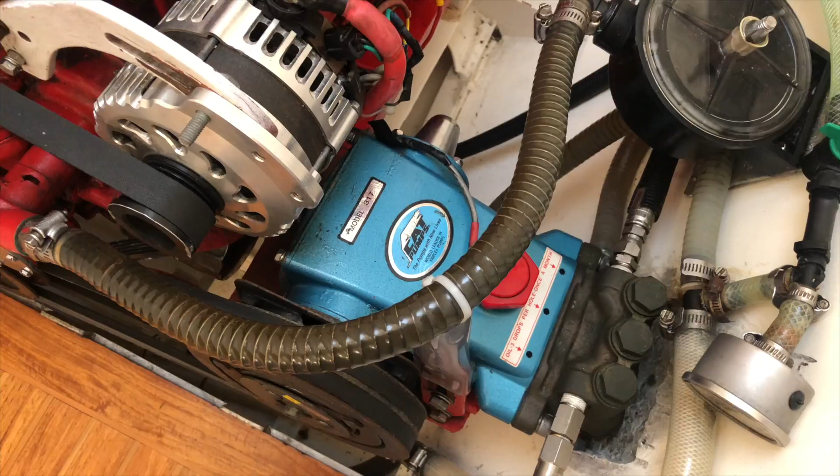I decided on a Cat pump. There are cheaper pumps available, but I think it was the most reputable. Cost about half the total cost of my system. Cost about $1,500, including the clutch, the electromagnetic clutch. So mine is an engine-driven high pressure pump.

You can use AC motors that you would belt to your high pressure pump. Then you need to work out how to drive your 1.5 horsepower AC motor. Can you do it from your inverter alone, or are you going to need to have a generator to run? Even the little Honda generator could probably run that. However, mine's engine driven, and that's what I'll describe to you.

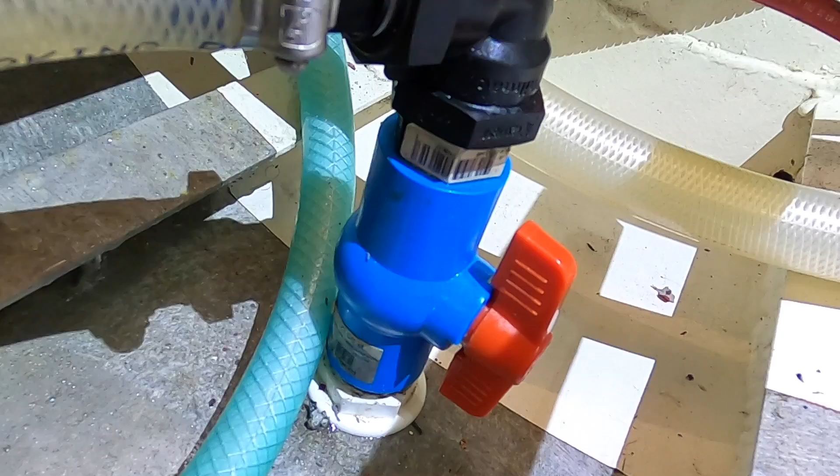So from the very start of the flow is the through hull. I decided to use a dedicated through hull, that's mostly recommended, so there can be much less chance of flow interruption. Mine is nylon because I have an aluminium boat, so all my through hulls are nylon or acetal, plastic anyway. My seacock is a simple $3 or $4 screw-on PVC type seacock.

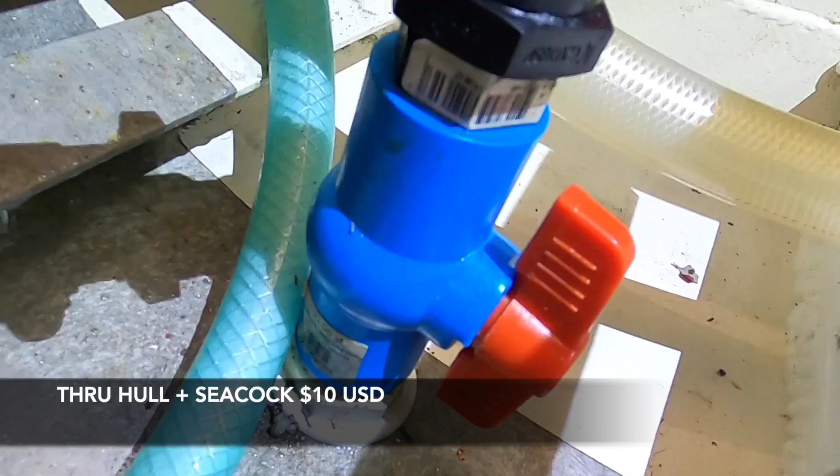All these aluminium boats are using this sort of seacock. You could argue that it's not safe, but we've never had a problem. If you're really worried about it, you can change them out every 5 years, and it's going to cost you about $5. The next in the line is the sea strainer, and I simply used an engine intake sea strainer, which costs $40 or $50. It's just to stop the big particles, seaweed, plastic, etc.

After that comes another PVC valve. These again, $3 or $4 each. From there onwards, basically, it's into the high pressure pump. But you need to have a manifold because there's a few different things you want to suck into your system. One of them is the seawater. Another one is freshwater for flushing.

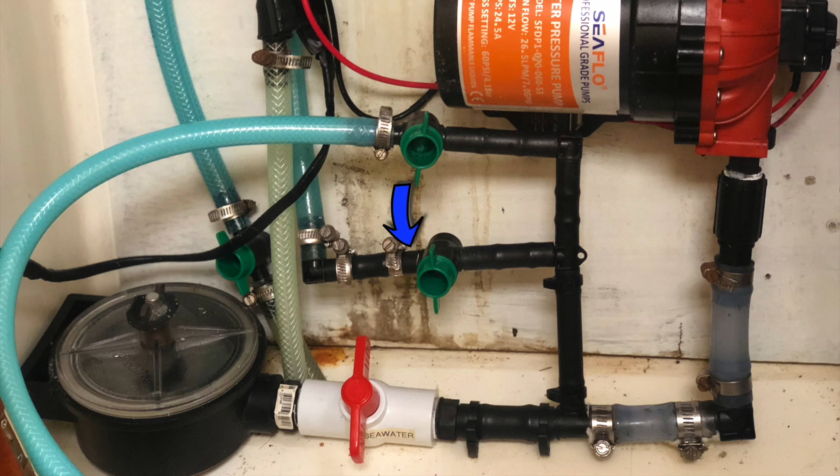So I've used a 1/2-inch poly piping from the hardware with the little irrigation taps that you can buy from the hardware for just $1 or $2. And I've plumbed that into my freshwater system, so it's on the house water pressure system. All I have to do is turn on the little valve, and I have house pressure water going through my system for flushing. I nearly forgot to mention, for the freshwater input, you need a carbon filter.

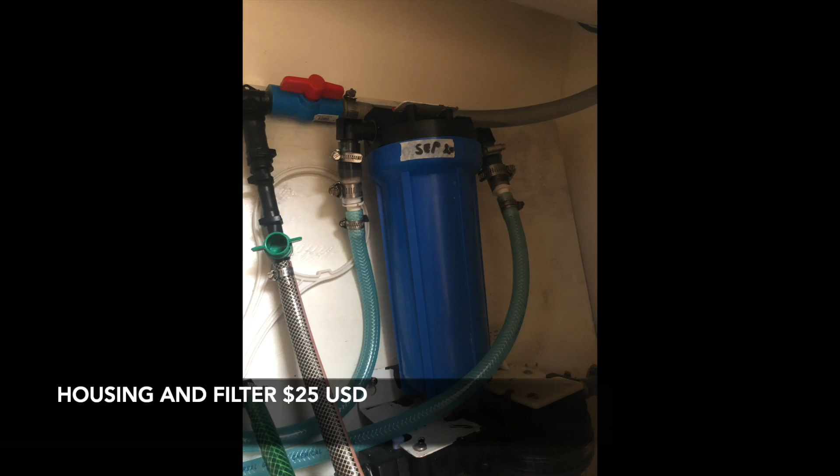So I've plumbed into my freshwater system, permanently connected to the watermaker, a carbon filter. So for flushing, you may use city water. Maybe you put city water in your tanks when you've filled up at the marina. There's obviously chlorine in that. Chlorine will destroy your membrane. Flushing is best done with water that you've made from your watermaker, it's completely pure, but more often than not we fill up at the marina when we can. So we need to flush that through a charcoal filter before it goes into the system.

And one other input for your system is the pickle. If you're going to leave your membrane for a while, I prefer to flush my system every 4 days, but if I'm going to leave it longer than that, if I'm going away for a week or two, I will pickle the entire system, which is sodium metabisulfite. I bought that in kilogram blocks.

You can buy it from, I think supermarkets may sell small quantities. Home brew shops sell it for cleaning beer bottles, but you want bigger quantities. I bought mine from China, food grade sodium metabisulfite. I think I bought 5 kilograms of it, and I'm still using it 3 or 4 years later. So yeah, you want a pickle input, and that's simply just a hose with a valve, and you put the end of the hose in the bucket of your pickle mixture when you want to pickle the system.

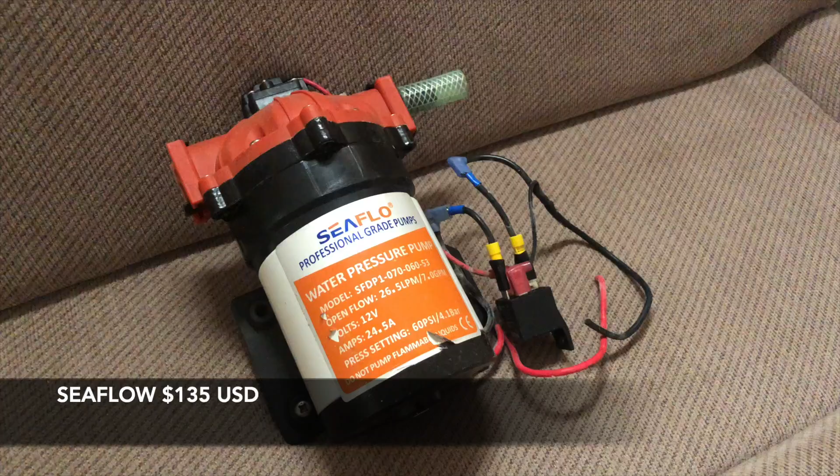Now the boost pump, I hope I wasn't saying high pressure before, the boost pump, I got this brand SEAFLO and I bought it from China. I've seen it online for similar prices that I bought it. It's about $120 to $150 US, far cheaper than the other classical marine brands. And specifically this one is a high output. This is 7 gallons per minute.

This one's been on for about a year now and it's been running beautifully, no problems at all. Quick connectors, they don't leak. Been happy with it. In fact, I bought 2 because I thought it was a good price and I wanted a backup pump.

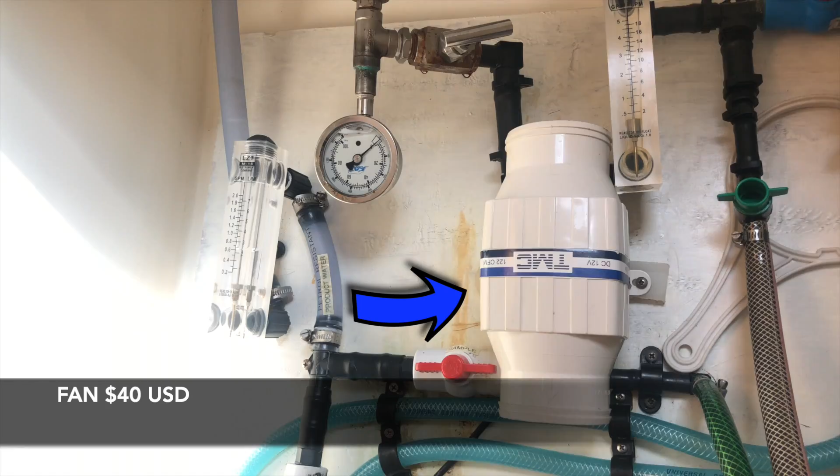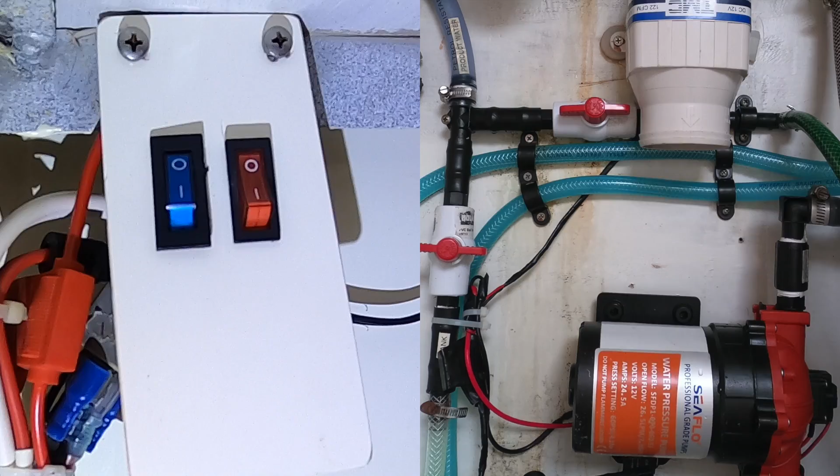Now it's a good idea to protect your boost pump from overheating by installing a fan. And I found the most economical and efficient fan was a 4-inch bilge blower, which I bought for about $30 or $40. And it really generates some wind and keeps that pump cool. And you can wire that to the same switch as your boost pump. Obviously it needs to be rated for a suitable amperage to include the boost pump and the fan.

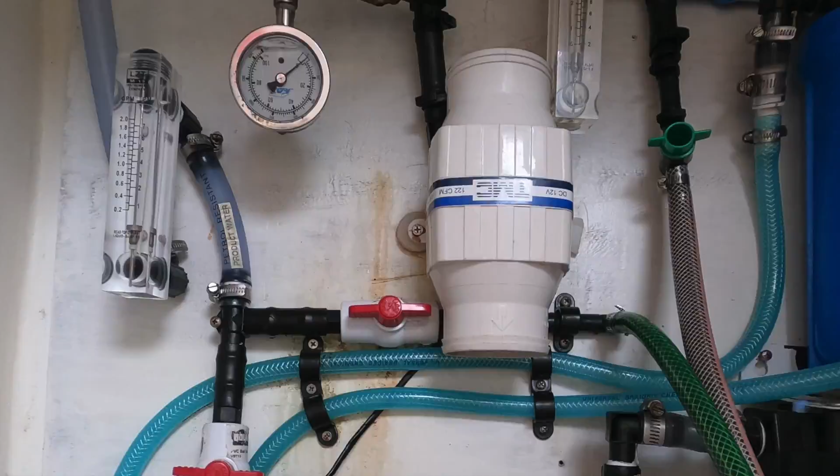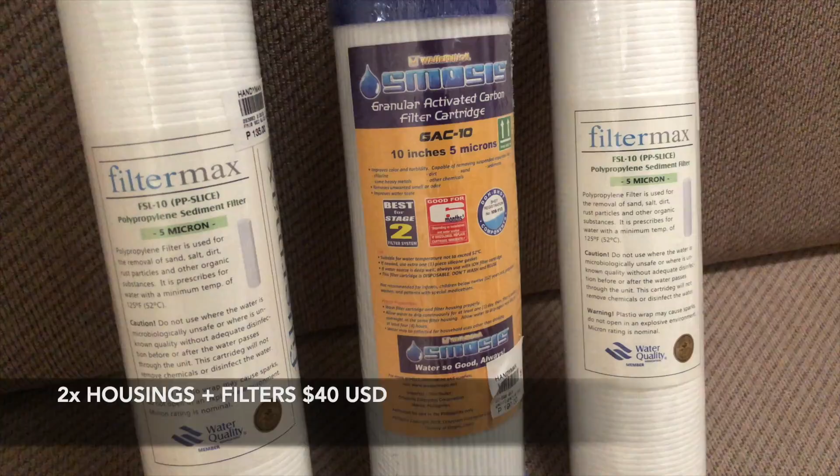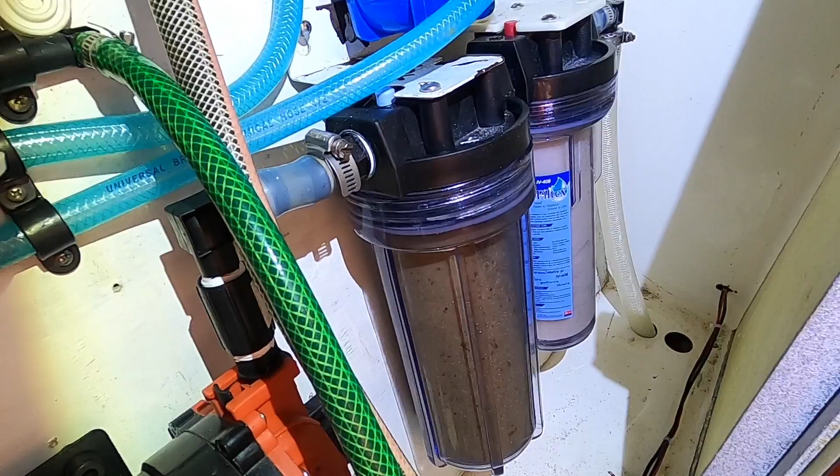After the boost pump goes into the filtration, the pre-filters. So they're just standard from the hardware. They're 10-inch cartridge. You just unscrew them to change the cartridge. They've got a little bleed valve on top to vent the air out. Starting off with 20 microns, or you could use 10, and the second one would be 5. Next stop for the major component is the high pressure pump. So let's take a look at a video of the high pressure pump installation.

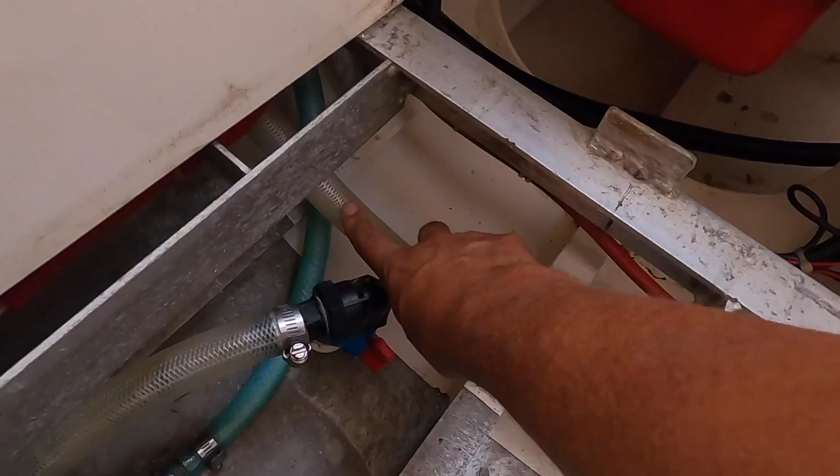Into the first filter, which is a 20 micron. And then the second filter is a 10, I think. Maybe 5. It just depends what I could get in the hardware at the time. And then the hose runs down under the floor. And here it is here, running up under the bilge into the engine compartment where I have engine driven Cat pump.

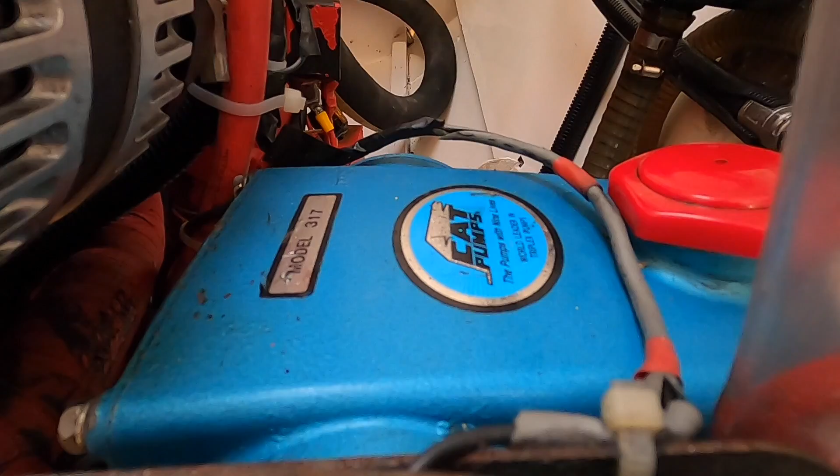I have a model 317 and I chose this pump because it was a higher output, and that's the need for the higher boost pump, 7 gallons a minute, to feed this big guy because it's really sucking and you need to keep positive pressure. So this hose runs down to the input, which is over the back here, and there's the output, and that's the high pressure water.

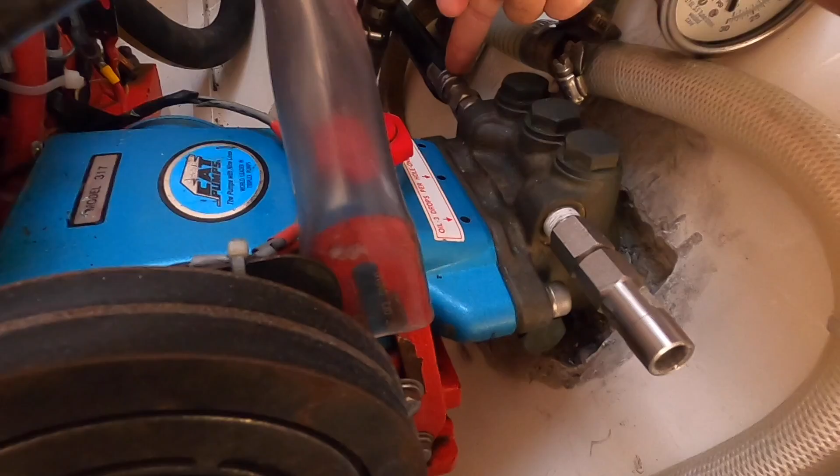Here is an emergency bypass valve, and you can set that with an Allen key, and I get that just dribbling if I'm about 850 psi. Maybe it's 825 psi. Operating pressure is 800 psi for seawater.

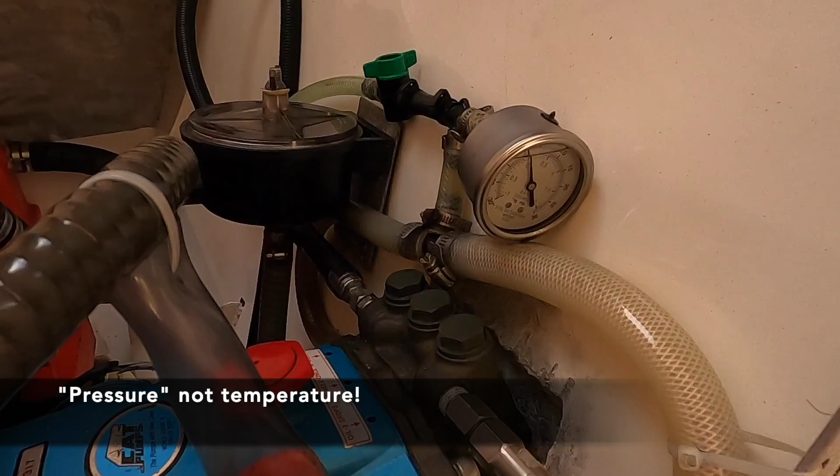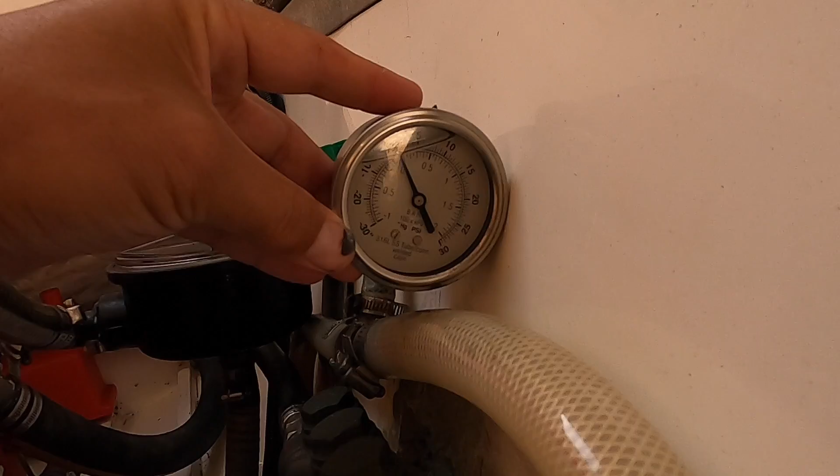This is my gauge to show me the boost pressure. I always like to keep a positive, just slightly positive pressure at the pump face. So there's a 0 here, goes to -30 if there was suction, and it goes +30 to show positive pressure. I'll turn on the boost pump right now and you'll see. So the boost pump provides good pressure. Obviously that will come back to near 0 when the high pressure pump is operating.

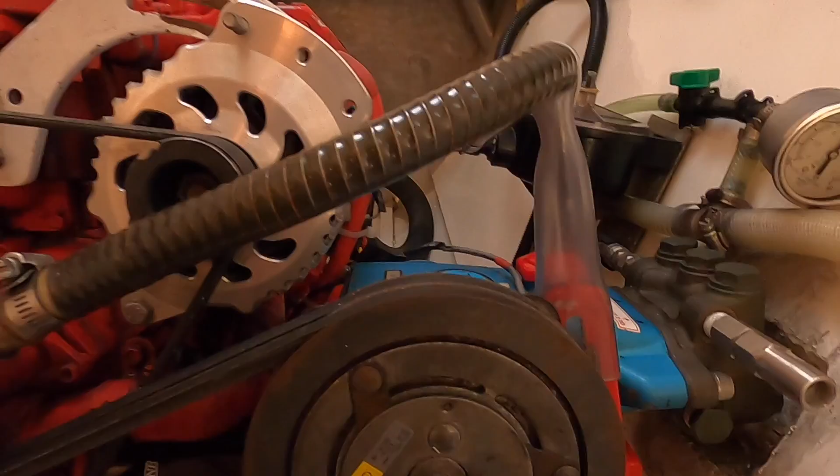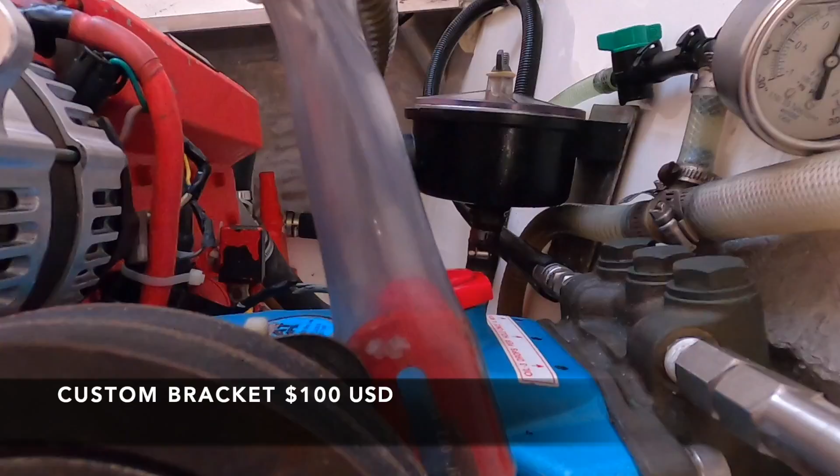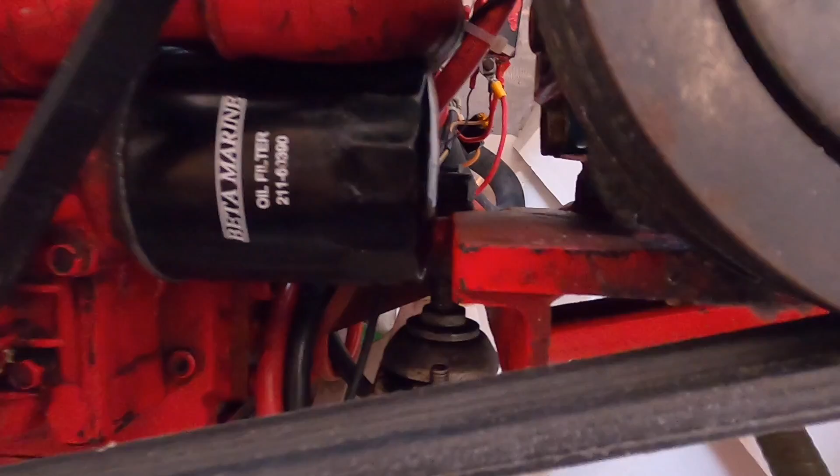So the challenge for the engine driven was to mount it. This one is mounted, I'm not sure if you can see down in there, but it's got like an L bracket with a tensioning arm so that we can put tension on the belts. And the bracket is on a piece of angle iron which runs across the top of the 2 engine mount nuts. It needs to be kept in the same sync and vibration as the engine.

You can't have the belts leading off to a separate bracket on the side of the bilge, for example, because the engine does a lot of moving, especially during starting. It does a lot of shaking and twisting, and it's just better to have it all in one unit that we've found. So I've just got 2 V-rib belts driving this high pressure pump.

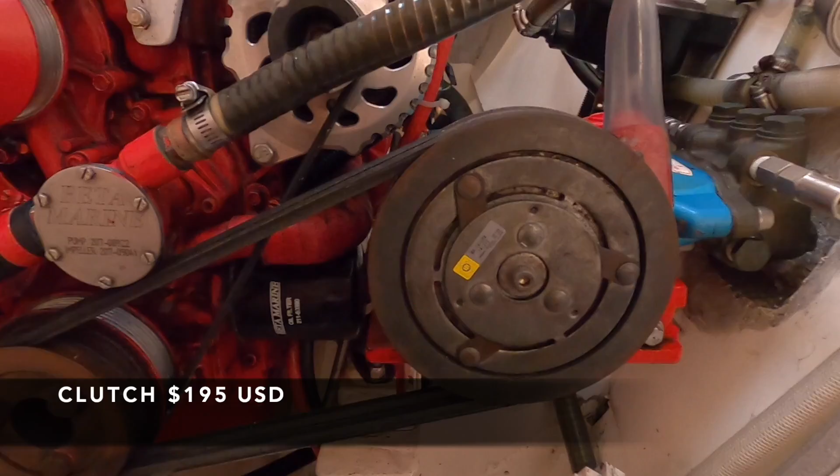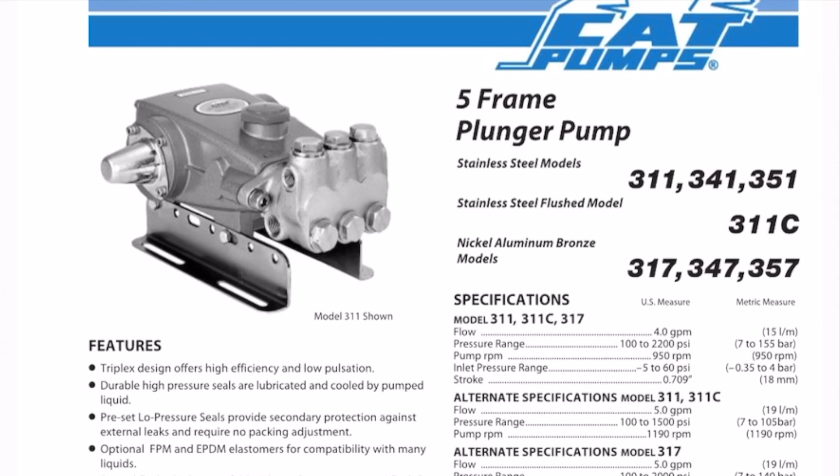This here is an electromechanical clutch, and I will turn it on right now. You'll hear it. And off. So I will turn that on and off as required, and I'll show you that later. As I mentioned, mine's a Cat 317 pump, and this one features a nickel aluminium bronze head, which is suitable for seawater. You can get a stainless steel version, but it's a bit more expensive.

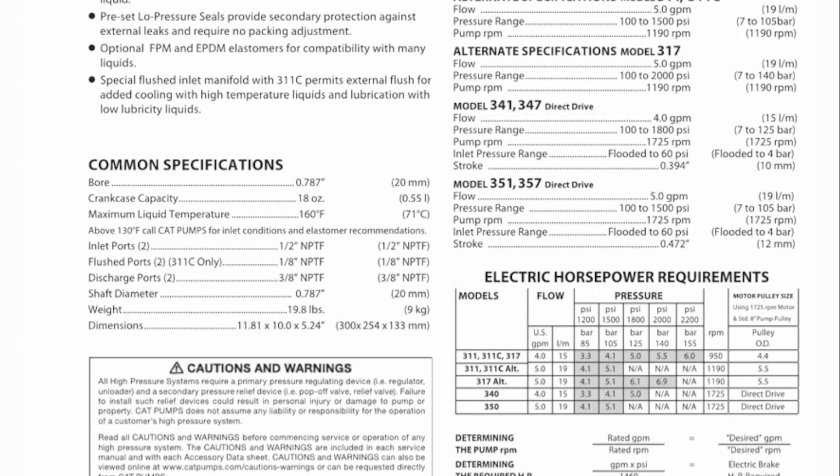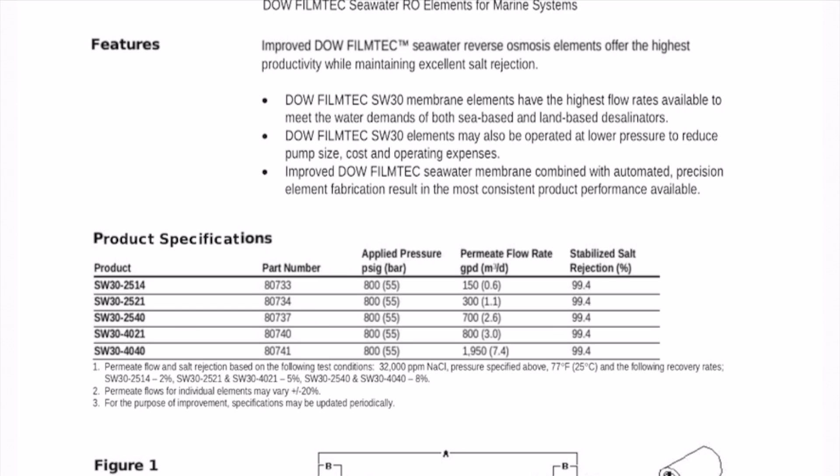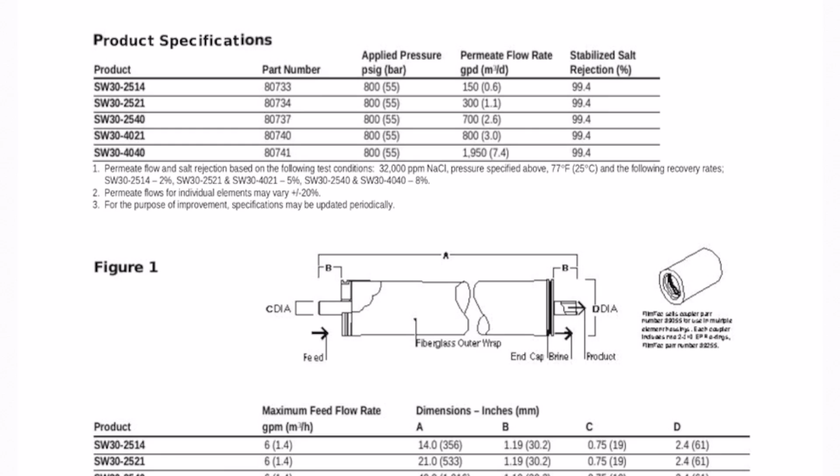Now, things to consider when determining which pump is suitable. The maximum volume or flow rate of the watermaker is determined by the membrane limit. In my case, I've got a large membrane, 4" by 40" long, so if I wanted a perfectly matched system, I would need really a bigger volume high pressure pump, and then of course a bigger boost pump. However, like most of us, we're all limited by space and of course funds.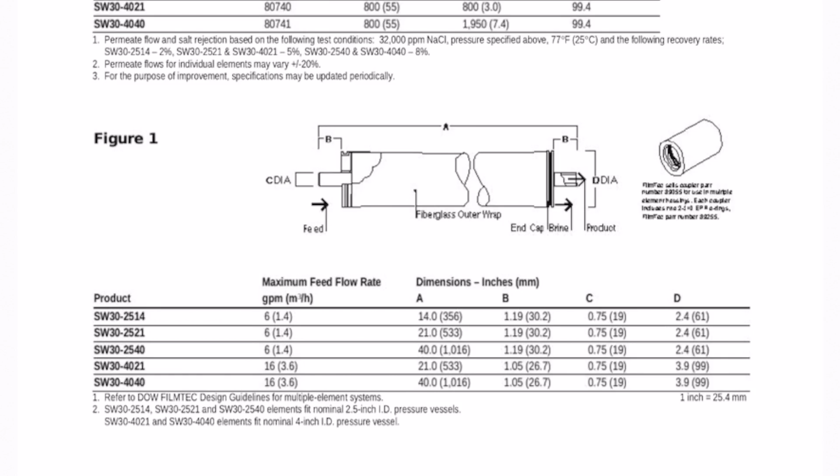The maximum feed flow rate for the 40/40 membrane is stated as 16 gallons per minute. My boost pump outputs 7 gallons a minute, so I've got a lot of room before I'm reaching limits on this membrane.

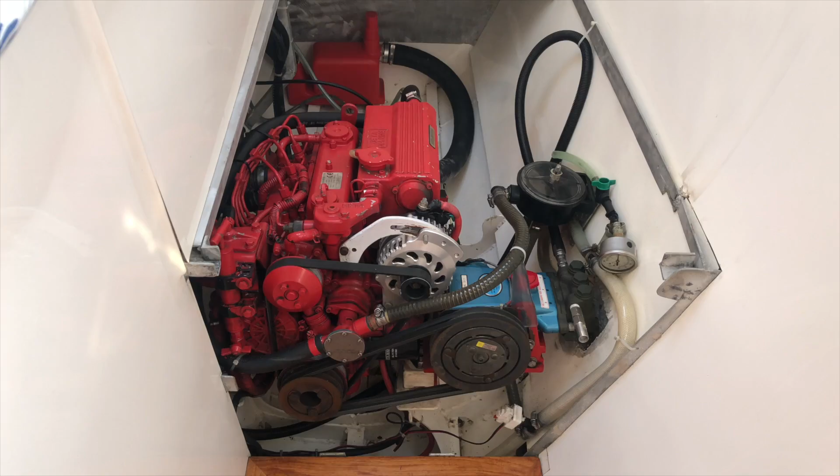You need to make a decision on what RPM you want your engine to be running whilst you're making water. Do you want it sitting just above idle, or do you want it at cruising speed? This will determine the size of the pulley mounted on your crankshaft. Use this formula to calculate the size of the pulley.

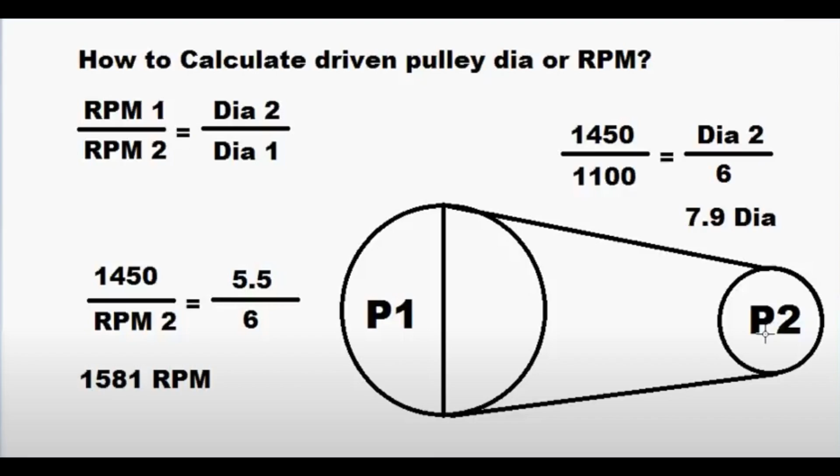Just prior to the high pressure pump, I have a pressure switch which I bought for $2 or $3 again from China. It's from AliExpress or Alibaba if you can find the low quantity orders there. And it's a normally closed pressure switch, so if there's no pressure, the contacts are closed. When there is pressure, the contacts open.

So this will tell me if there's a blockage of the intake, of the filters, or a failure of the pump. If there's no pressure, the switch will close. And I've just got a piezo buzzer that makes a big loud noise to tell me that I've lost pressure, and I can do something about it quickly before I wreck my Cat pump.

You could wire it, if you wanted, to disengage the Cat pump. I haven't done that as yet. I'm happy with the audio alert because I'm always on board when the watermaker's running.

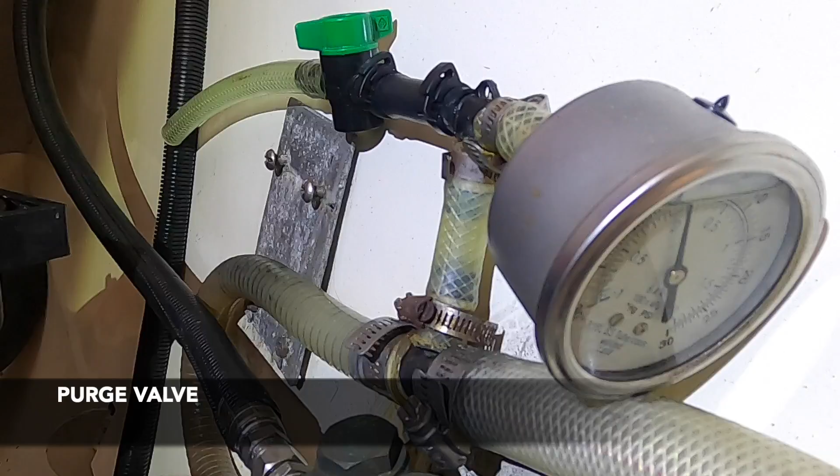Next I have just a little T bracket, a T piece and a purge valve. It's just, again, a very cheap little irrigation poly pipe valve, and that's just to remove air from the system before it gets to the high pressure pump. You don't want air going through there. I've only ever had to bleed it initially, like if I've cleaned everything, I've taken it all apart and there's air in the system. Normal operation, I'd never have to bleed it.

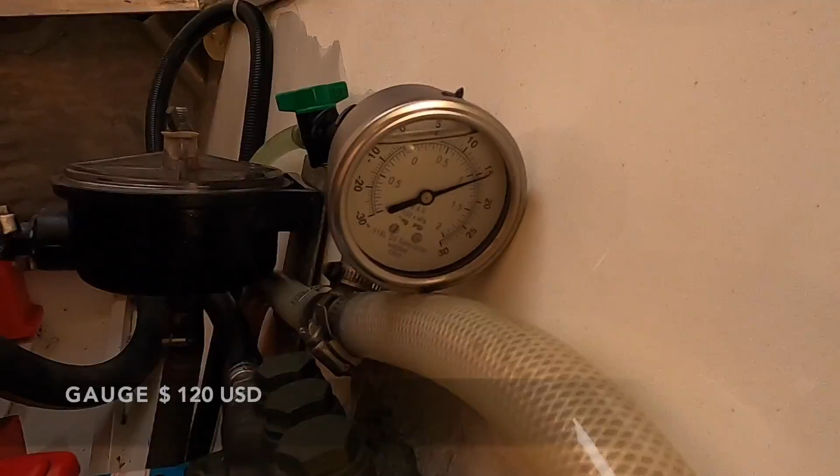So that produces a positive pressure at the high pressure pump. Now I know it's positive because I have a gauge there. Now these gauges, this one I bought online. They have to be stainless steel because they're dealing with salt water. And they want to be glycerin filled, not oil filled, because any oil, if it was to leak, would get inside your membrane and destroy it. So glycerin filled.

Okay, up to the high pressure pump. As I mentioned, Cat 317, it is driven by the engine. It has an electromechanical clutch. So when the engine's at low revs at idle, I turn the clutch on, it engages the pump. Then I take the revs up to, I've set my revs to a cruising or motoring speed. About 1700 or 1800 RPM is what I would normally motor sail or even just motor on.

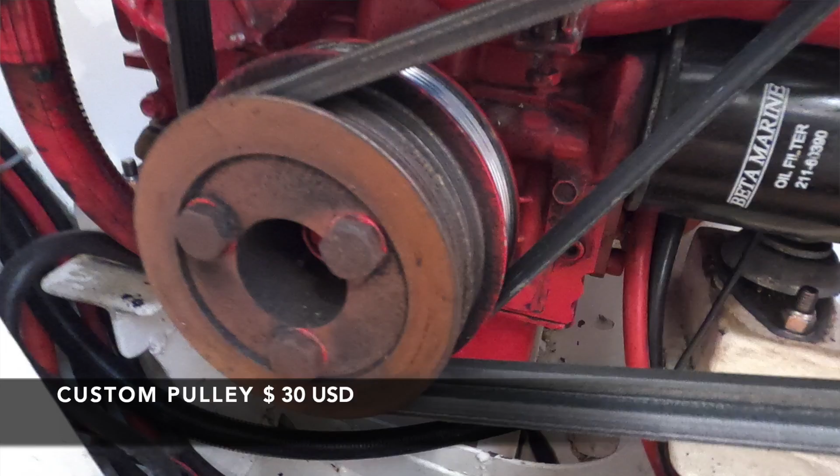You can adjust the revs of the engine by choosing the pulley that you mount on your flywheel or your crankshaft pulley. There's a calculation to work out which size pulley you need to go to this clutch, because it has a certain diameter clutch. You need to choose the appropriate size pulley for the revs that you want to run at. You may want to run it at idle while you're at anchor. You would make water, but I wanted to do it while I was motor sailing.

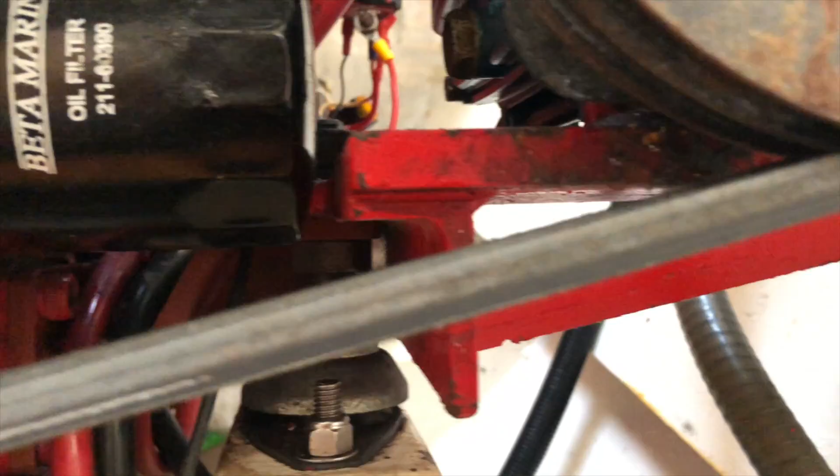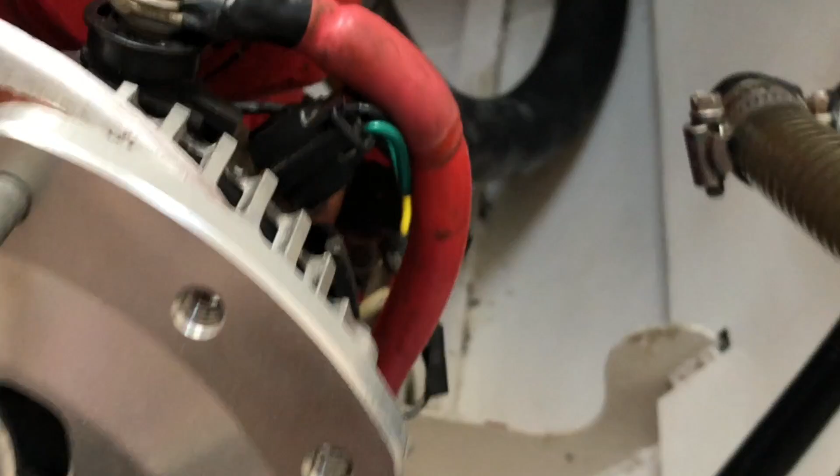The bracket which the high pressure pump is mounted on, we had to make a little bit by trial and error, but basically it's on an L-shaped bracket with an adjustable arm so that I can put tension on the V-belts that drive it. That is mounted on a piece of angle iron which runs across the top of two of the engine mounting bolts, the two big studs which hold the engine down. I've just undone the top of those nuts and put that across, done them up, and that keeps the pump, which is quite heavy, I think it's about 20 to 25 kilos, in the same plane as the engine.

I've had a friend who suggested mounting it in the hull, and he tried this, mounting it in the hull, having the drive belts run down to this fixed mounting in the hull. But the engine does a lot of moving, more than you realize, like when you're changing revs, and maybe at idle it's really wobbling, and during starting it really tilts, and it actually broke his brackets. So this is a much better way. So the engine and the high pressure pump are mounted together basically.

From there we have a high pressure hose. This is the only high pressure hose I have in the system. This is where I get our 800 psi. So it's a hydraulic hose. I got a hydraulic company to swage it up for me. It's stainless steel end fittings. They had to be special ordered.

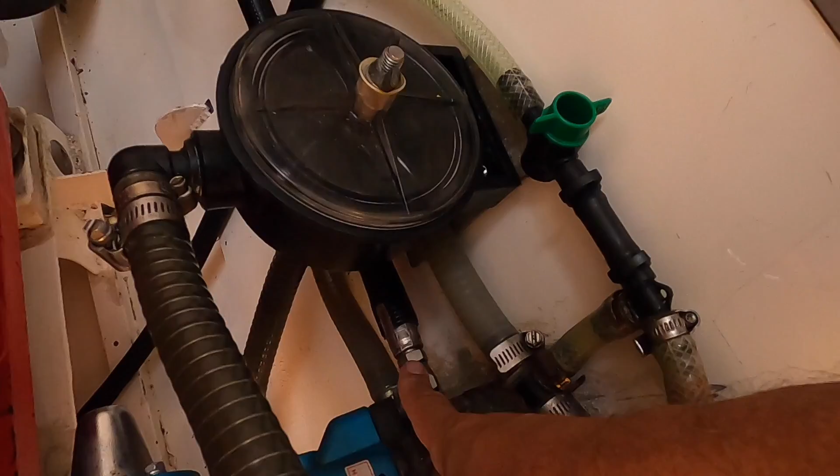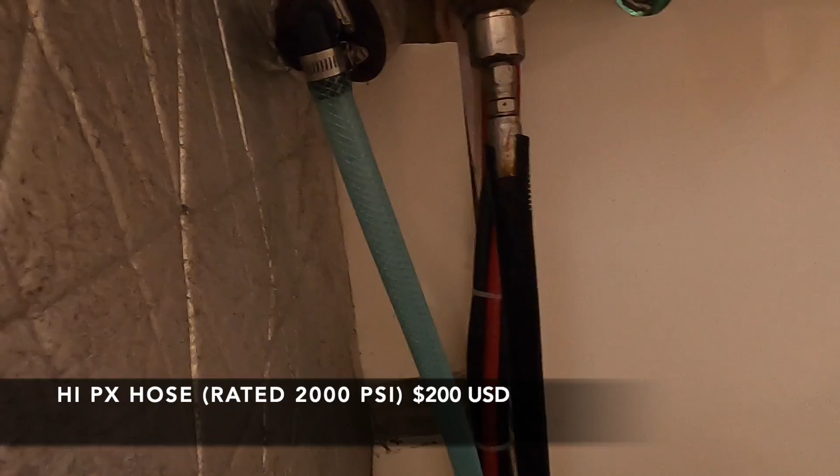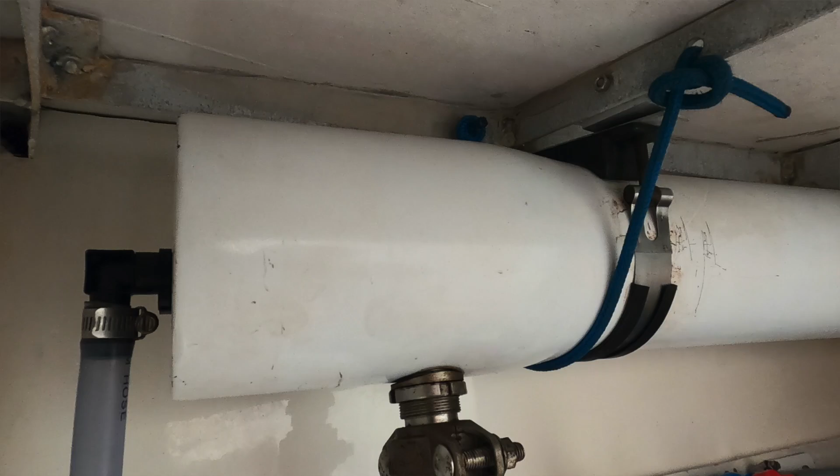The hose, I think it's 1.5 meters, this probably was the most expensive part of the plumbing system, the hosing. Maybe $200 US. I can't quite remember. So that high pressure hose goes up to the pressure vessel. The pressure vessel I sourced from China also. I was looking online. I could find a particular model which I found in the States.

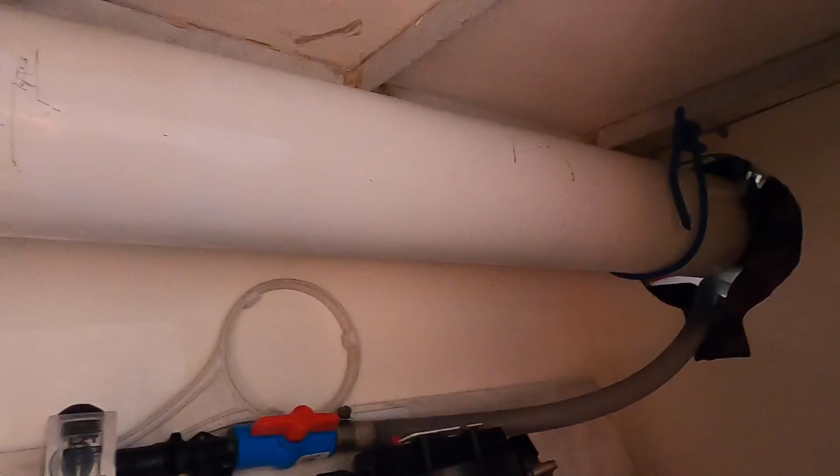When I was looking at Alibaba or AliExpress, I found the exact same pressure vessel. So this company in the States obviously just sources from China, so I thought, well, I'll buy from that company too, and I did. As an idea of savings, I got the cheapest price I could find. A 4-inch, 40-inch long pressure vessel in the States was about 1,500 US. I got this one for 600 US, so nearly 3 times cheaper, and perfectly happy with the quality.

I mean, you must be careful when you buy from China. You can't know what you're going to get all the time, but out of a lot of things on this boat I've bought from AliExpress, there's only been 1 or 2 out of perhaps 30 purchases that I've been not happy with, and I have told them I'm not happy with this, and they've given me an immediate refund. I don't even need to return the product. So I've been really happy dealing with them. Often it's hard, the communication though. Their sales rep may not have a good grasp on English.

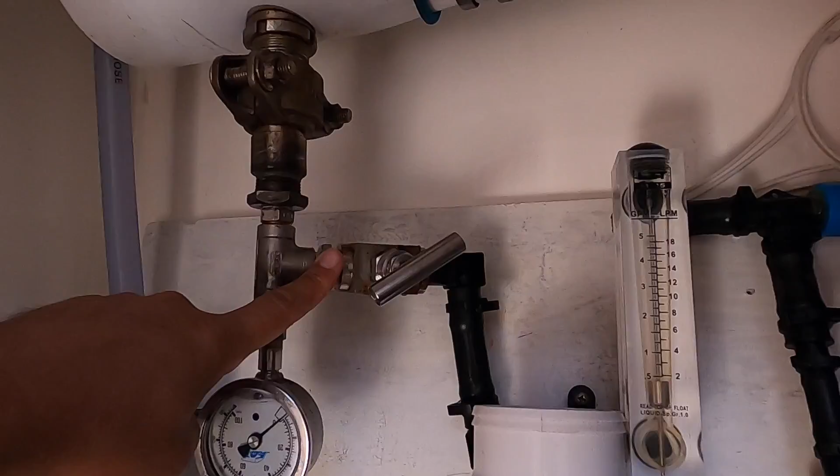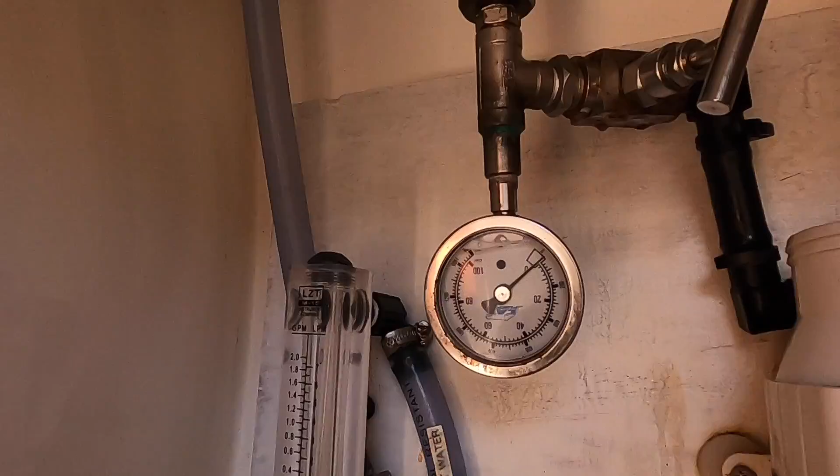The other end of the pressure vessel, I have the pressure regulating valve, which is just the needle valve. Very simple piece of kit. I got mine from China. It's 304 stainless steel. I took it in to have an adapter ring put on it at the hydraulic shop, and the guy there in Australia, he said, wow, nice bit of kit, this stainless steel, and it cost me $20. I've got 2, one for spares.

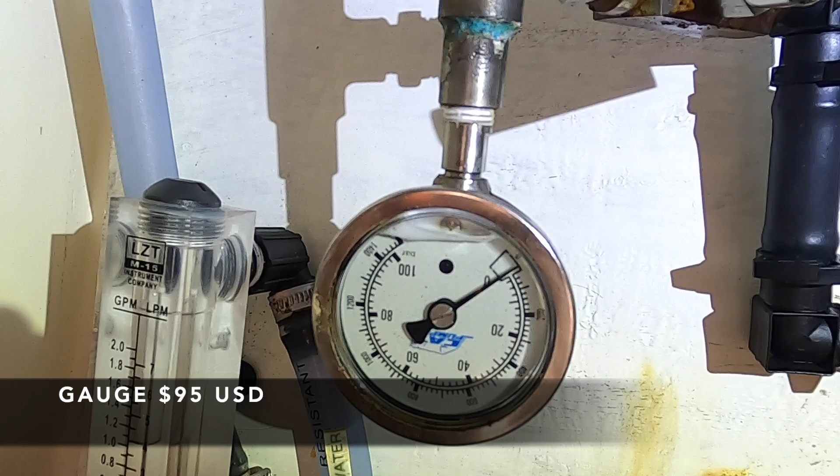This is where the pressure regulating valve goes, and you will also need a pressure gauge there. I got this one. This one must be stainless steel again, and not that critical, but I got glycerin filled again, not oil. Not critical because it's downstream of the membrane, but who knows, you know. After the pressure valve, after the needle valve, is low pressure.

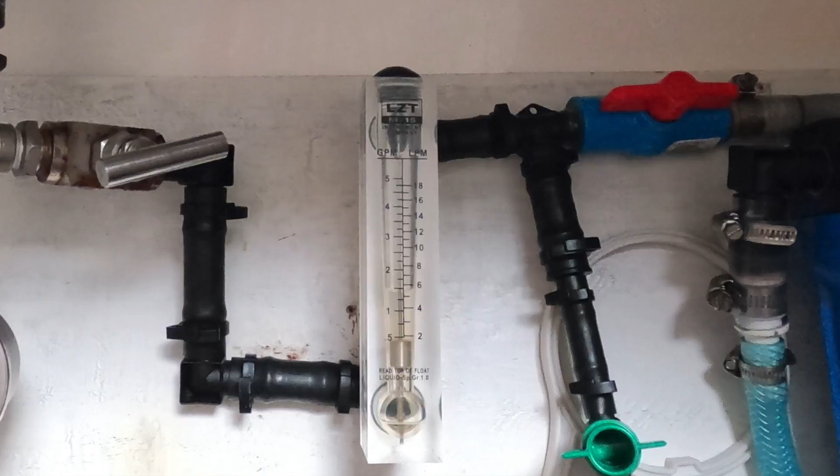Now you can go back to your cheap poly hosing, which I've used, just irrigation, the black poly hose, using all the elbows and T's and their joiners, and I get the occasional drips, and I can try and replace them, but I am chasing drips now and again, and now I've just sort of given up chasing the drips. I just accept there's going to be a couple of drips into the bilge. It's no big deal.

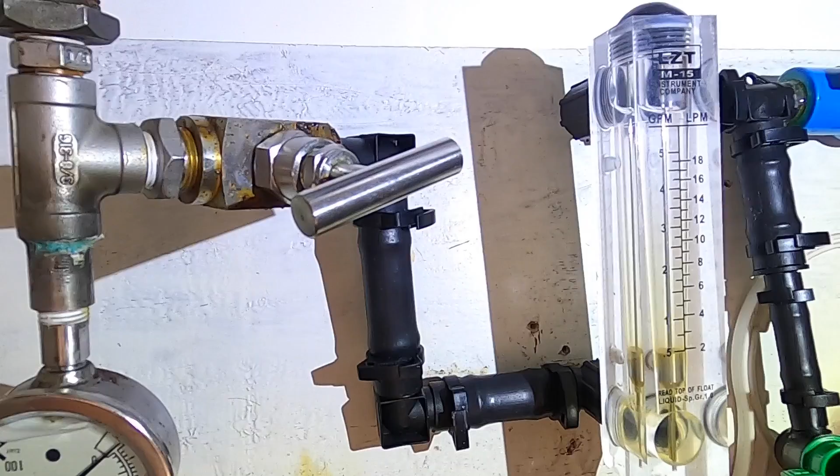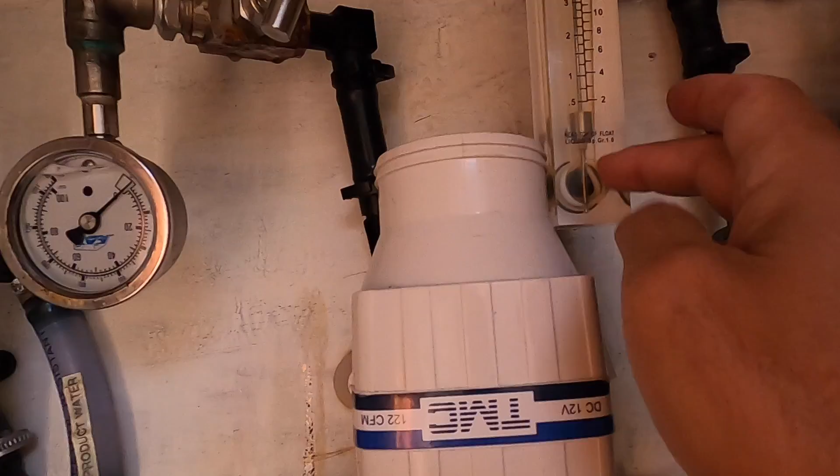So after the pressure regulating valve goes to my flow meter. Now this is brine. This is the wastewater, and I don't need a flow meter there, but I wanted one because they were $8 each from AliExpress, and I just want to measure the ratio of brine to product water, and that'll give you an idea of the efficiency and the condition of your membrane. Brine, or the reject water, comes through here, flows behind there into this flow gauge. This tells me the brine flow, and I can keep an eye on the ratio of fresh water to brine, make sure the efficiency is still good.

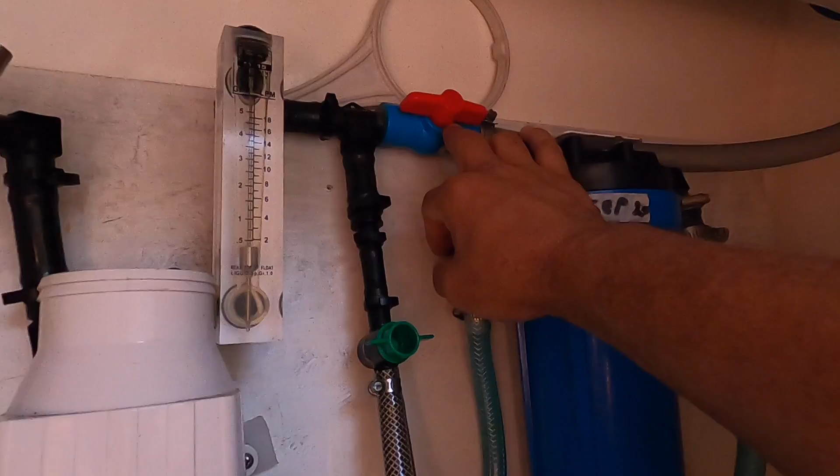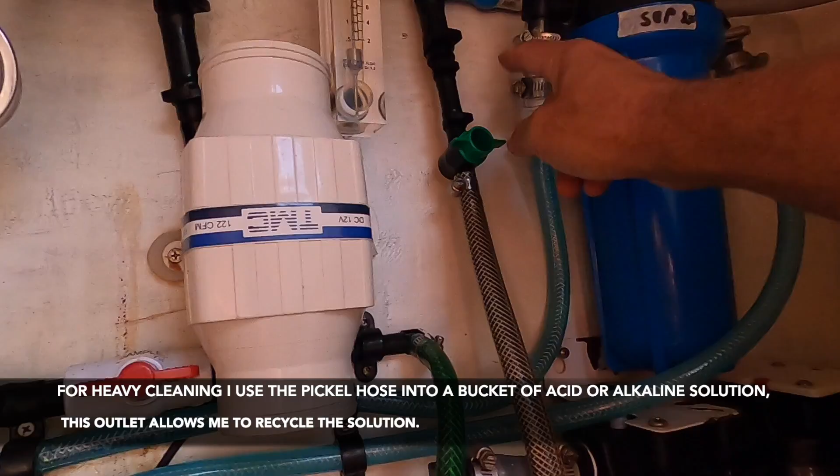This goes out through here and overboard. There's a through hull over that way. If I want to, I sometimes flush acid or alkali through for heavy cleaning, and I put this one into a bucket, and then I can keep flushing a circulation of acid or alkaline cleanser.

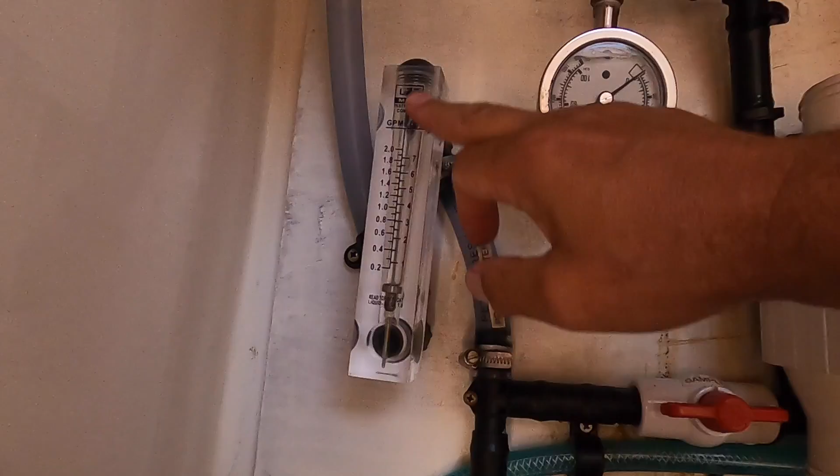Product water is coming out the end of the pressure vessel, and it is also low pressure. So it goes through this flow meter, and this is where I read how much water I'm producing, and that goes to my sample pipe, which is open right now. So I normally have to run the machine for 1 or 2 minutes. I have the sample hose here, then I measure the TDS, the total dissolved solids. Once it's satisfactory, which is normally within a minute, I'm happy with less than 400 parts per million, but I prefer 300.

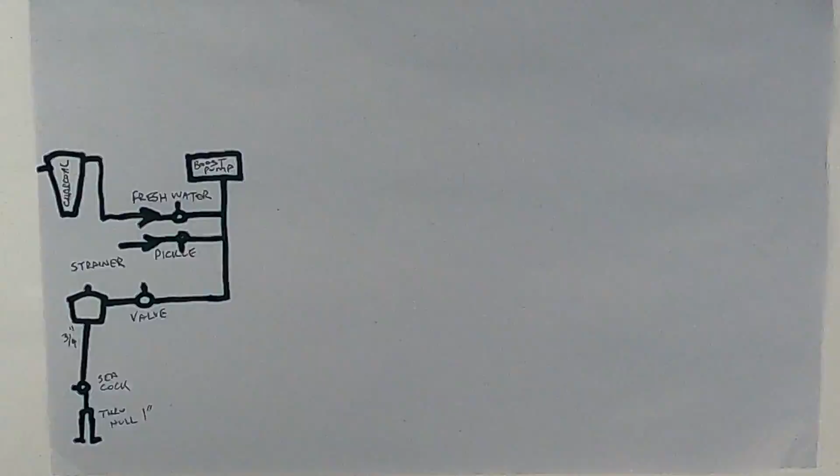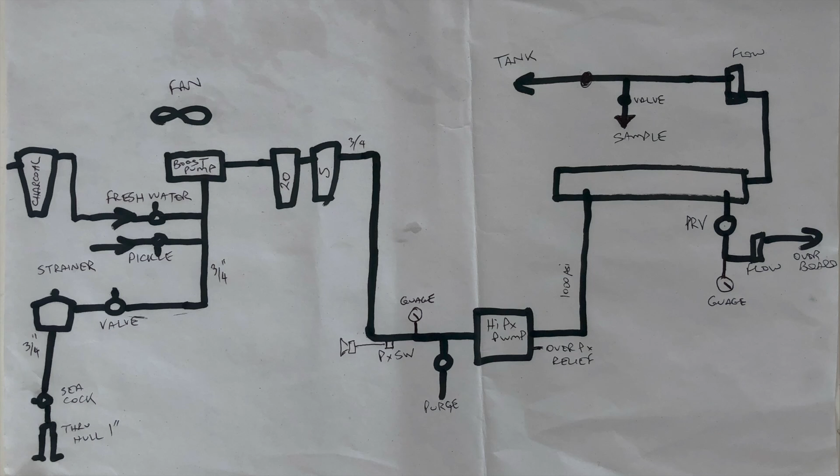Then I can open this valve, which goes straight to the tank. And once I open that, I turn off the sample. If you've got a lot of money, you can use a Y diverter valve here, but I couldn't find anything that was a reasonable price. Just got to make sure when it's running you don't turn both off, because then something's going to blow up. So open and then close. Okay, so in a nutshell, that is my DIY water maker on Jupiter 2.

I just wanted to comment on reverse osmosis water for drinking. It's not that healthy for you. It is devoid of minerals, and we need our minerals to keep our electrical systems working from our brain to our body. So you need to supplement. So in our drinking water bottles, I add some of this product, if I can get it. It's from a health food shop. It's mineral drops. Just add a few drops to your drinking water. And also make sure that you're using Himalayan rock salt or sea salt, which has got a variety of minerals, as opposed to iodized table salt, which has only got sodium chloride. So that should keep you healthy.